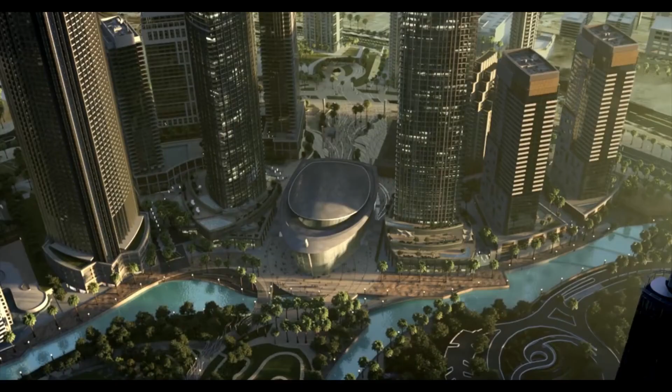With over $1 trillion worth of mega construction projects in the GCC, either planned or under construction, the region is not short of construction activities and potential opportunities for the near future. There has been a slowdown of new mega projects being announced since 2019 due to fall in oil prices and the coronavirus pandemic. However, the mega projects announced in the last few years present a wide array of opportunities to the industry participants, especially in the building, manufacturing, and infrastructure sectors.

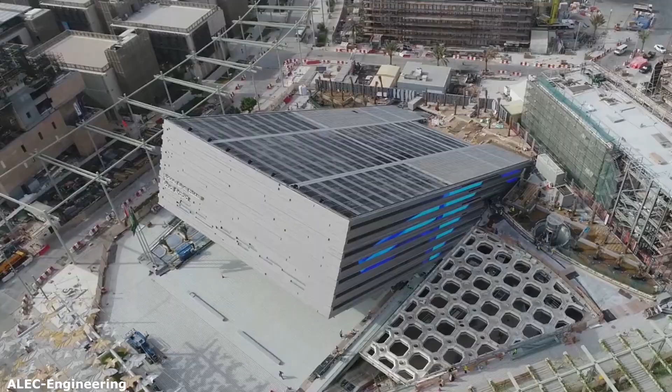These are the 10 mega projects handpicked by the Top Channel, which will keep the construction industry in the GCC region active in the near future. The projects are either in the pre-execution stage with construction expected to commence later this year, or in the early construction stages.

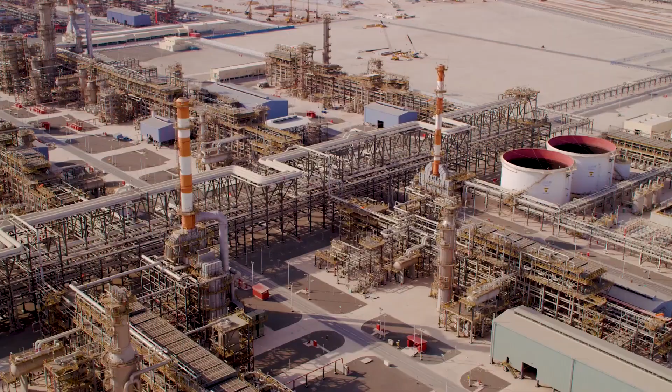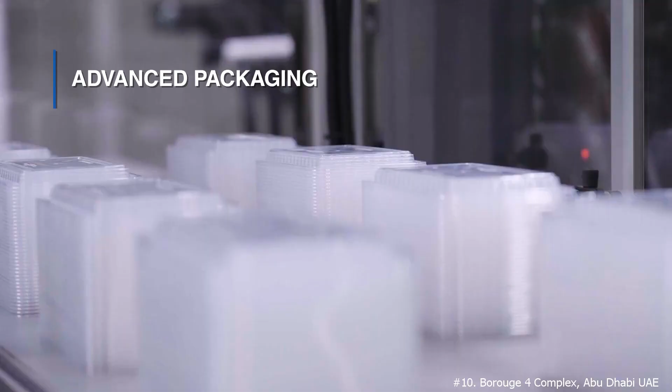Abu Dhabi National Oil Company, ADNOC, and Austrian chemicals producer, Borealis, have started construction of the fourth Borouge facility within the polyolefin manufacturing complex in Ruwais. The plant will help to boost the local supply chain and meet the projected growth in demand for polyolefins in the Middle East, Africa, and Asia, while providing critical feedstock to the TA'ZIZ Industrial Chemicals Zone in Ruwais.

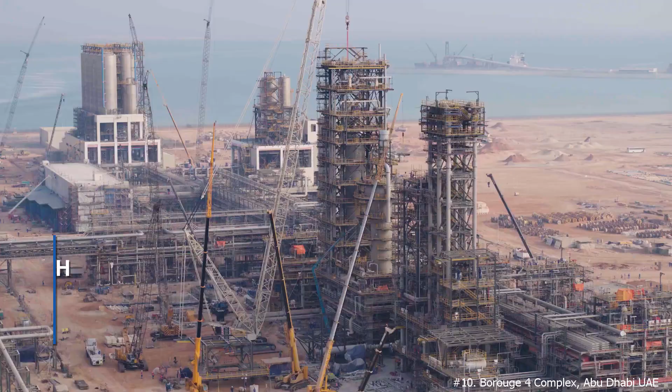The construction of the factory began in February. It will use Borealis' proprietary Borstar technology to produce polyolefin solutions across the industrial sector and will cover an area the same size as about 500 football pitches.

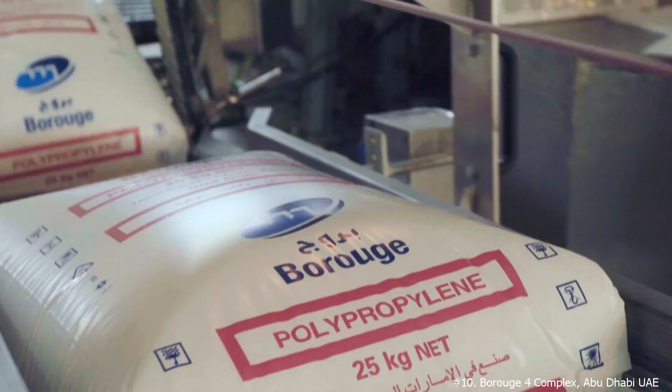Abu Dhabi plans to triple its petrochemical production capacity from 4.5 million tons, currently produced entirely by Borouge in Ruwais, by 2025. Borouge's first polyethylene unit was commissioned in 2001, with a capacity of 450,000 tons per annum. Borouge 2 and 3, commissioned in 2010 and 2014, raised the capacity to 2 million tons and 4.5 million tons of polyethylene and polypropylene per annum, respectively.

Borouge 4 will increase the company's overall polyolefin production to 6.4 million tons, making it the world's largest single-site polyolefin complex.

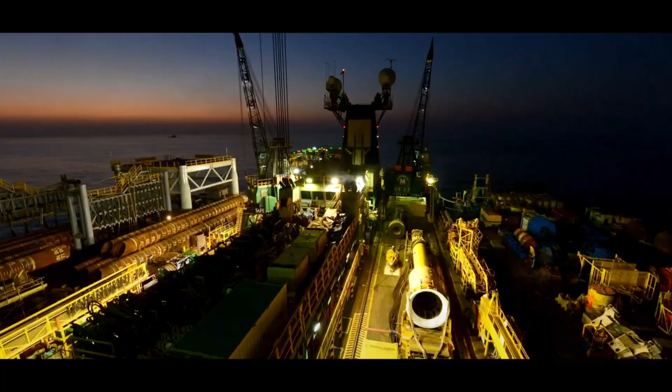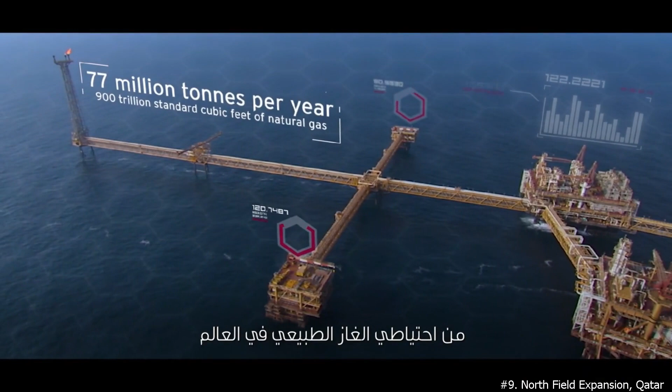The North Field East Project, or NFE, is an expansion of the North Field, the world's biggest single non-associated natural gas field, offshore northeast Qatar Peninsula. The North Field Gas Development Project comprises the North Field Bravo and Ras Gas Alpha offshore complexes, which together contribute approximately 2.8 billion standard cubic feet per day of gas to the total production capacity of the field.

The North Field represents the southern part of the giant natural gas field that is shared between Iran and Qatar. The Iranian side of the field is known as South Pars. Formerly known as the North Field Expansion Project, the NFE project is expected to increase Qatar's LNG, liquefied natural gas, production capacity by 43% from 77 million tons per annum to 110 million tons per annum.

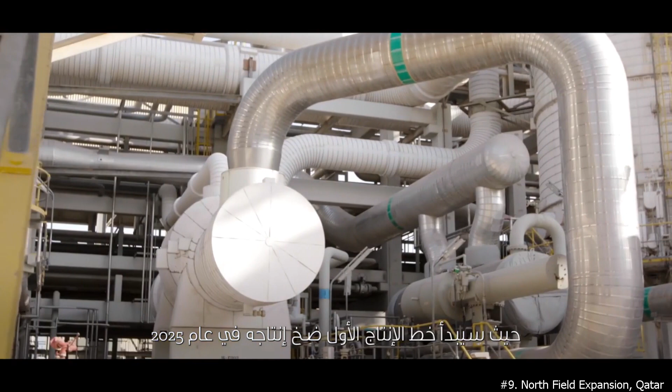When coupled with the North Field South Expansion Project, the combined output will raise the country's total LNG production to 126 million tons per annum, making Qatar by far the largest single LNG producer in the world.

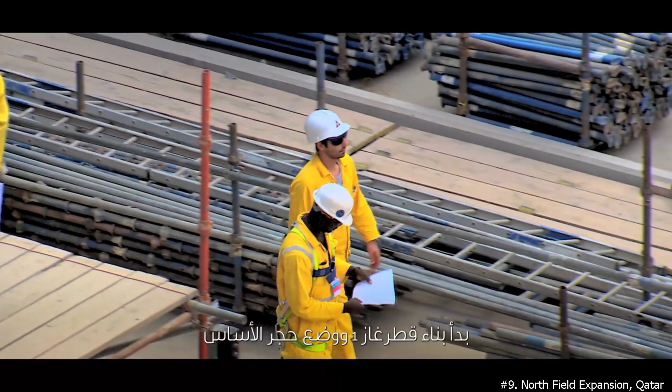Qatar Energy announced the expansion of the gas field in April 2017 after revoking its 12-year self-imposed ban on field development. A moratorium was imposed to evaluate the impact of the growing output from the reservoir in 2005.

First gas from the $28.75 billion project is expected to be produced by 2025. Total production is expected to be 1.4 million barrels of oil equivalent a day. The project is in line with Qatar's National Vision 2030, which aims for more sustainable development by 2030.

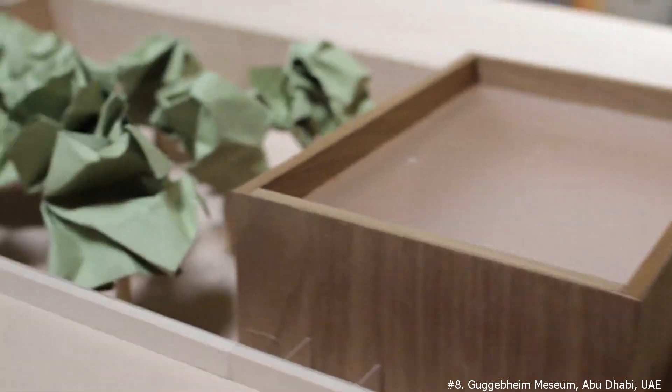Designed by legendary architect Frank Gehry, the Guggenheim Museum in Abu Dhabi will open in 2025. The museum will be located in the Saadiyat Island Cultural District, near downtown Abu Dhabi, where the Louvre Abu Dhabi was also constructed. The 42,000 square meter building will become the largest of the 4 Guggenheim museums, which has branches globally, including New York, Venice, and Bilbao.

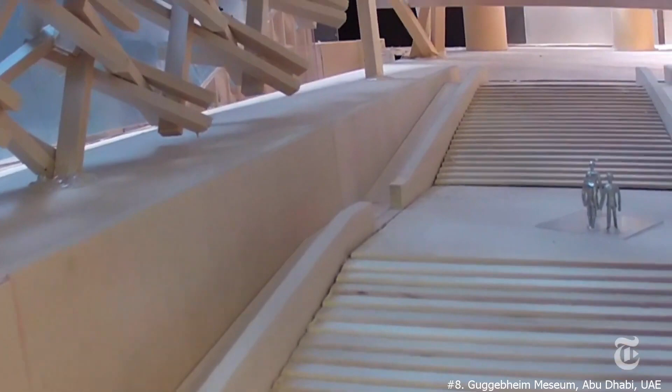Gehry's design is an artwork in and of itself and resembles a sculpture with its buildings of various sizes in conical and square shapes. The design of the building is an experiment in inventive 21st century museum design and will comprise a cluster of galleries of varying heights, shapes, and characters.

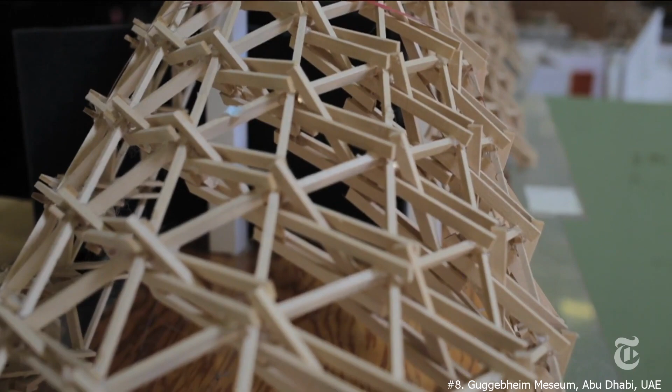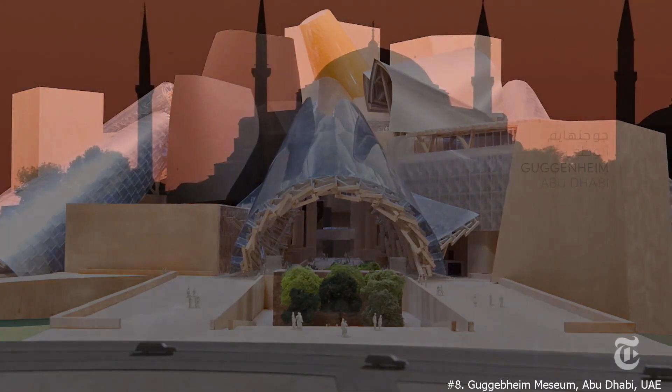The setting inside includes 27 galleries and spans nearly 125,000 square feet, a size comparable to that of the Tate Modern in London. The final building will also contain a Center for Art and Technology, a children's education facility, archives, a library, and a conservation laboratory.

Visitors can expect to see around 600 works from 300 artists who hail from 60 countries. The Middle Eastern, American, Asian, and African names are all represented. Art world stars such as Andy Warhol and Jean-Michel Basquiat will have works on display, alongside lesser-known Emirati artists such as Hassan Sharif.

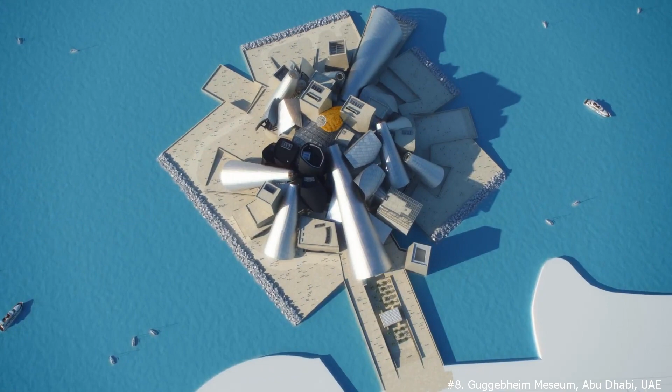Abu Dhabi announced its plans for the Guggenheim 15 years ago, but it has since been fraught with protests from artists and activists who accused the UAE of labor abuse. Cancelled contracts, the global financial crisis, and the crude oil collapse in 2014 that caused a slowdown in government spending only added to its many delays.

The race to build the world's tallest skyscraper never ends, with more and more impressive heights reached. Consider that, just a century ago, the world's tallest building was the Woolworth Building in New York at 241 meters high. It was 13% taller than the previous record holder, the Metropolitan Life Insurance Company Tower, also in New York.

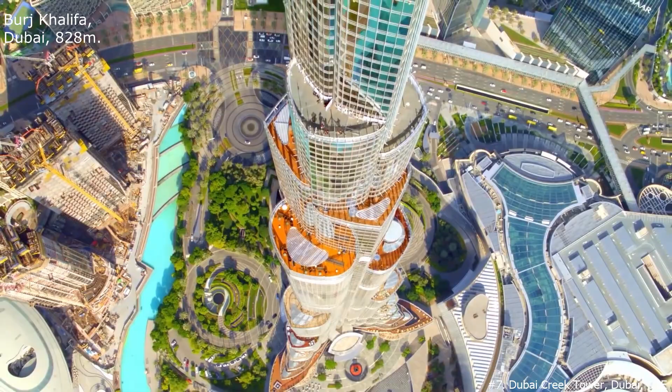In this new millennium, the famous Taipei 101 in the Taiwanese capital shattered the psychological threshold of 500 meters. In recent years, the record was firmly snatched by the Burj Khalifa in Dubai, which, topping out at 828 meters, has held the record since 2010. But this supremacy seems destined not to last too much longer.

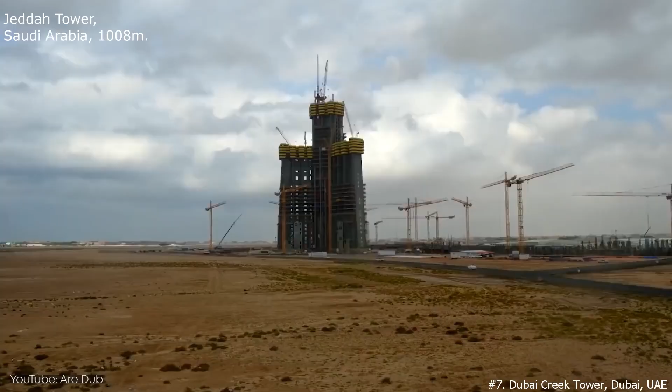The Saudi Crown Prince, Mohammed bin Salman, or MBS, is no joke of a man. His vision for his country is on steroids. The Jeddah Tower on the shores of the Red Sea is destined to reach 1,008 meters, far more than the Burj Khalifa. This project persuaded the sheikhs in Dubai to begin construction of the Dubai Creek Tower to wrestle back the world's tallest tower record and create another flagship tourist attraction.

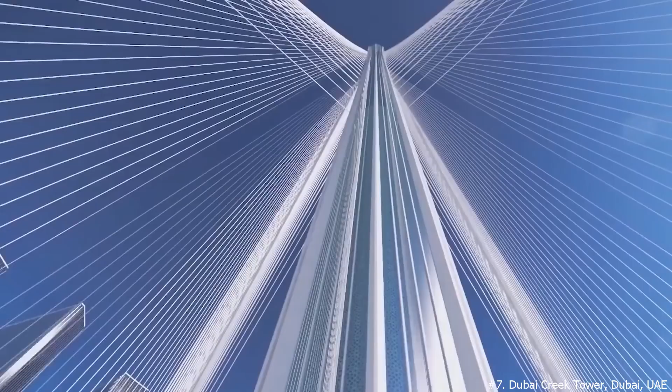The Dubai Creek Tower's shape will extravagantly differ from any other skyscraper. The design is inspired by the Islamic architectural tradition, specifically the architecture of age-old minarets, and the desert lily flower is also a source of inspiration.

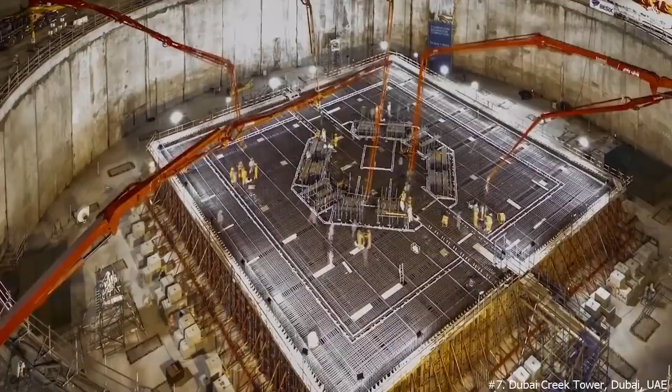Construction work began in 2016, and after foundation preparations were completed in May 2018, the whole project was put on hold temporarily due to the COVID-19 pandemic. At that time, no construction activity had occurred on the site of Dubai Creek Tower for almost 2 years.

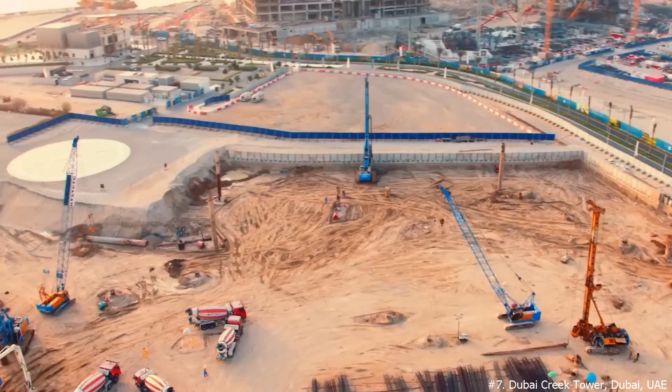All mentions and renders of the tower were removed from the project's website at some point during July or August 2020. On December 7, 2020, the suspension of construction was declared indefinite, until the government allows work to resume once the pandemic is under control.

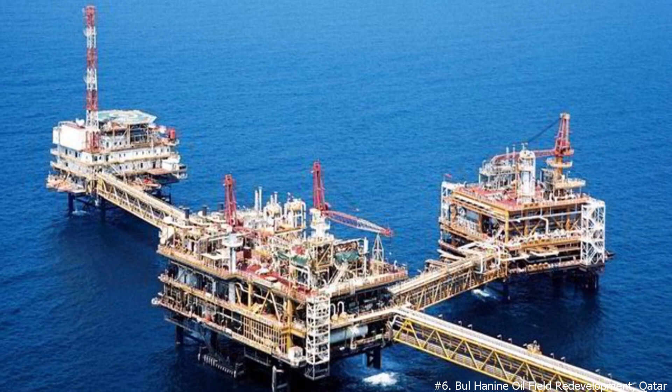Bul Hanine Field is located approximately 120 kilometers to the east of the Qatari coastline and currently produces 40,000 barrels of oil per day. The field was discovered in 1970 and opened in 1972. The oil field produces high-quality crudes, associated gas and condensate, and is operated by Qatar Petroleum through offshore production station PS3.

Qatar Petroleum, the field operator, announced plans to redevelop the field in May 2014 when oil prices were about $110 a barrel. The collapse in oil prices since then could mean the project will be delayed, or that Qatar Petroleum will seek to reduce the cost of its development. The redevelopment was aimed at increasing production to 90,000 barrels per day by 2028 to counter its declining production.

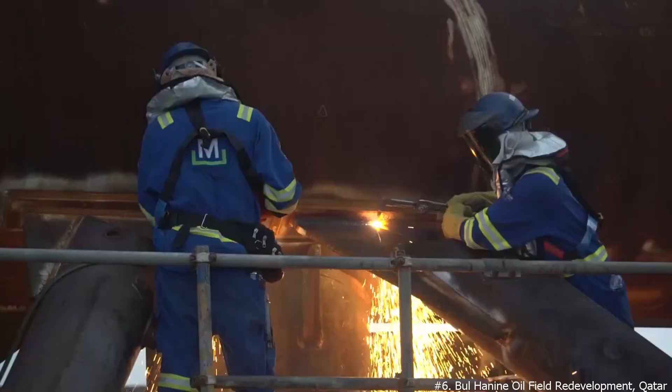A contract was awarded to McDermott International in October 2015 for the engineering, procurement, construction, and installation of 4 wellhead jackets. Plans for the field redevelopment involve an investment of $11 billion, making it one of the biggest projects to be managed and executed by Qatar Petroleum.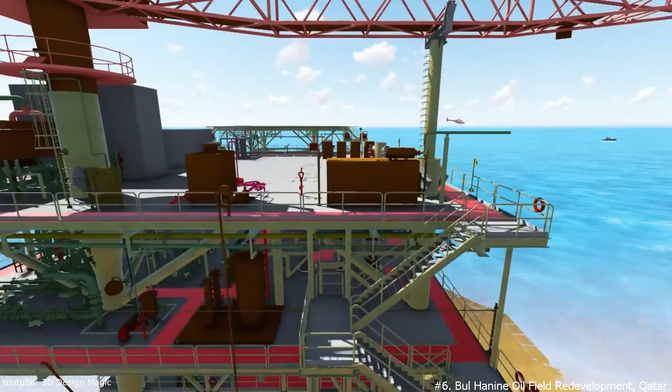A total of 150 new wells are planned to be drilled by 2028 from both existing and new wellhead jackets. Modification work will be carried out on the existing wellhead jackets for the excavation of new wells, in addition to installing 14 wellhead jackets. The Bul Hanine redevelopment project involves both offshore and onshore facilities that include a new central production facility and an onshore gas liquids processing facility at Mesaieed.

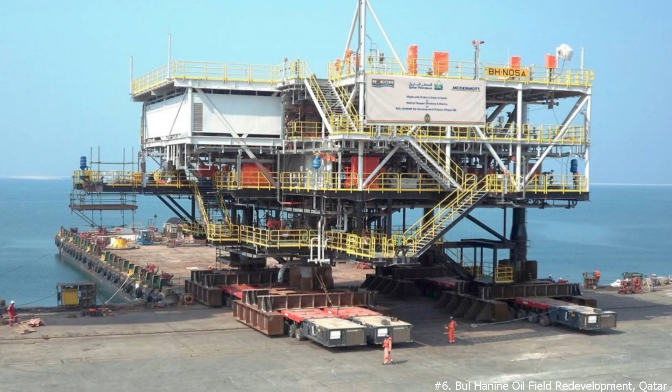An estimated 900 million cubic feet a day of sour-rich gas will be transported through a new 150 kilometer pipeline to Mesaieed for processing. An offshore central complex consisting of production, compression, utility, and living quarter platforms will be installed. Topsides will weigh between 4,000 tons and 14,000 tons. Fluids obtained from the wellheads will be processed at the complex.

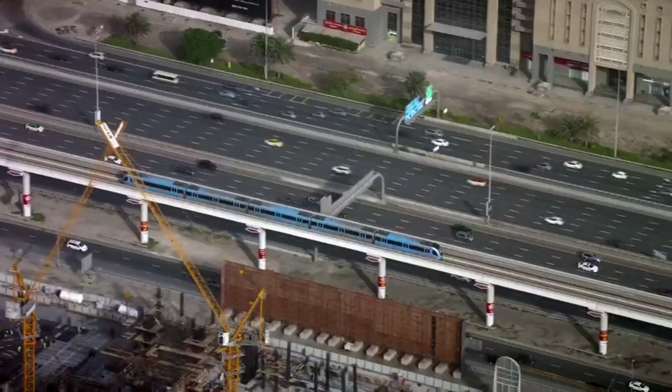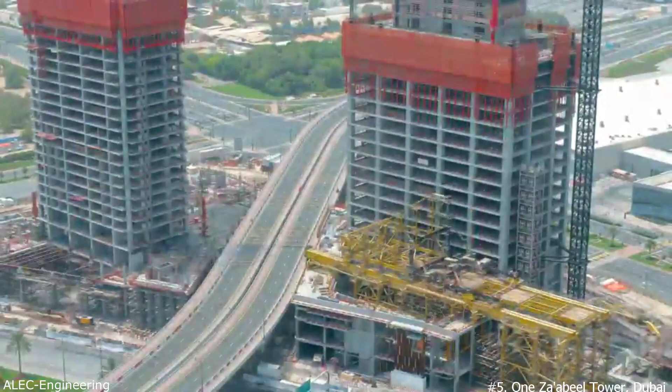Just when you think Dubai has run out of ways to impress the world, every one of us is proven wrong. Dubai has embarked on a 3.39 billion dirham development called the One Za'abeel Tower project, and it will be a welcomed addition to the iconic Dubai skyline. This tower opened its doors in 2021 and already has residents, those with deep pockets and big fat checks.

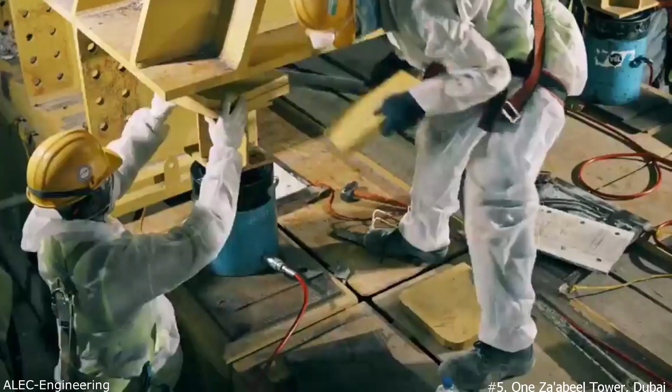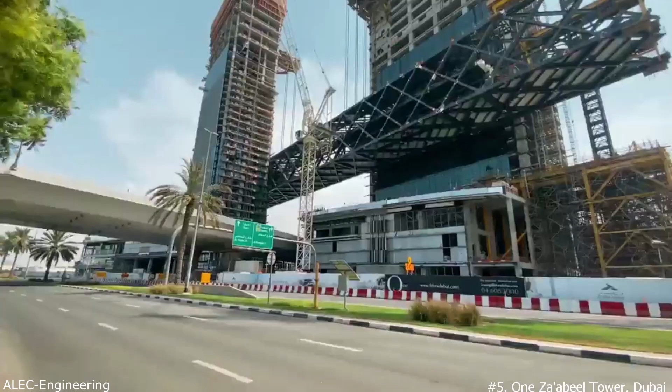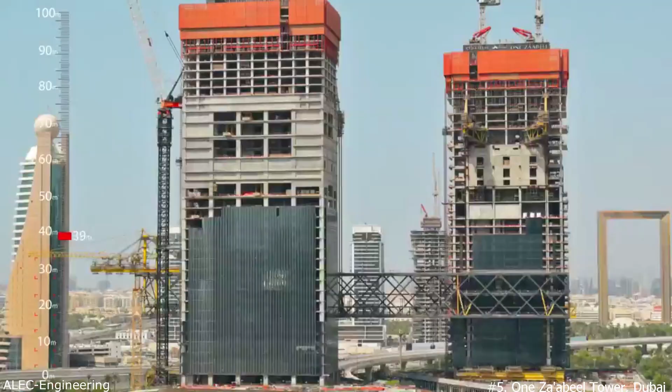Located at a crossroads between the old and new city, the project is in close proximity to Dubai's International Financial Center, International Airport, and the Gold Souks of Deira. Designed by Japanese firm Nikken Sekkei and developed by Ithra Dubai, the latest addition to Dubai's skyline is a mixed-use two towers project. Tower A, standing at 300 meters tall, hosts offices and a hotel, the world's first vertical resort, whereas Tower B, standing at 235 meters tall, is primarily oriented towards residential units.

The towers feature the world's longest cantilever bridge, suspended perpendicularly across the two towers at a height of around 100 meters and weighing 13,000 tons. One Za'abeel's link bridge is called the Link. The Link also reinforces the structural stability of both towers. Its diagonal tube structure provides vertical and torsional strength and allows their upper floors to utilize column-free spaces.

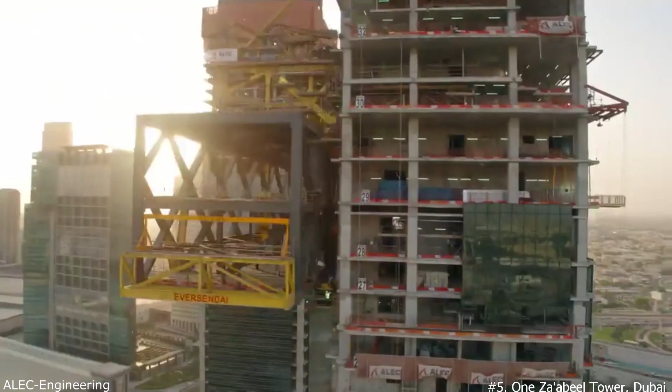The Link hosts entertainment venues, dining with celebrity chefs, an infinity pool, an observation deck with uninterrupted 360 degree views of Dubai, and an immersive glass floor experience.

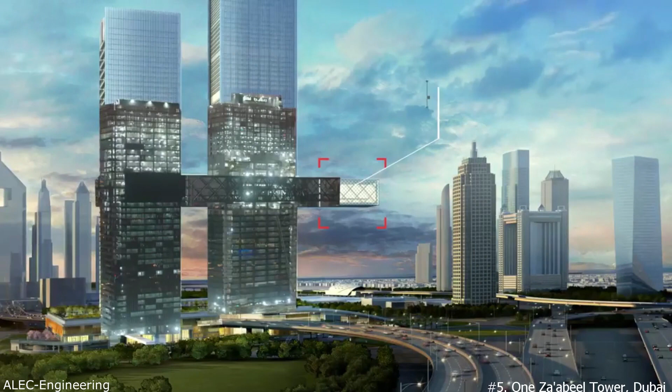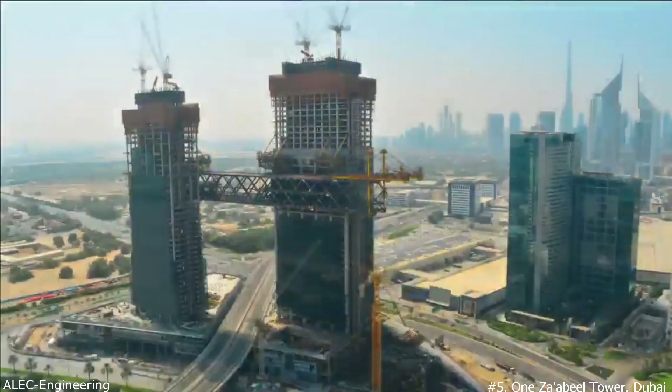The innovative design of One Za'abeel puts in place twin skyscrapers, rising over a total built-up area of 470,700 square meters. In total, there is 37,000 square meters of office space, 263 residential units, 12,000 square meters of retail space, 497 hotel rooms, and 77 high-speed lifts.

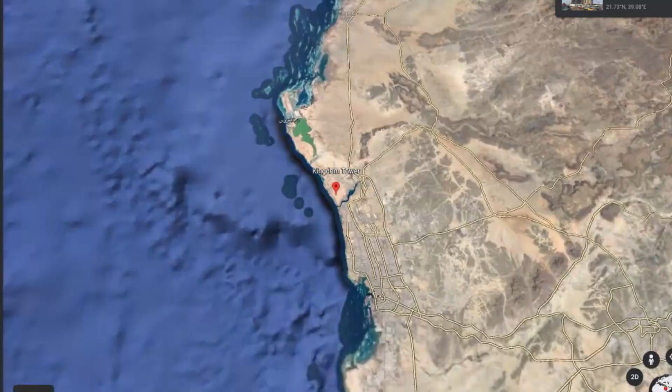Since we talked about the Dubai Creek, how dare we not talk about the Jeddah Tower? The crown jewel of a sprawling urban oasis. Previously known as Kingdom Tower, the Jeddah Tower is a skyscraper construction project currently on hold.

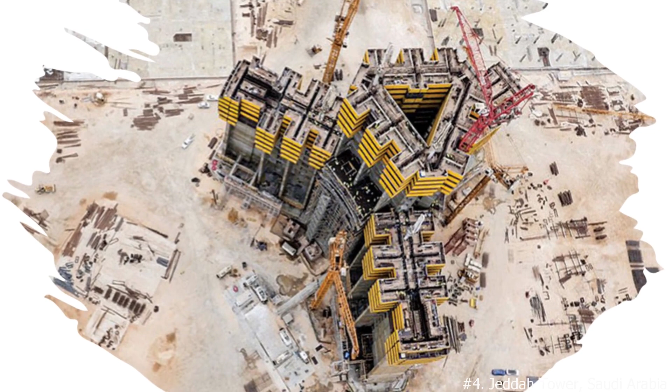Located on the north side of Jeddah, Saudi Arabia, it is planned to be the first 1 kilometer or 3,281 feet high building in human history, a centerpiece of the first phase of a development and tourist attraction known as Jeddah Economic City. The design, created by American architect Adrian Smith, who also designed the Burj Khalifa, incorporates many unique structural and aesthetic features. The biggest similarity being both towers have a Y-shaped plan with 3 exterior walls instead of 4, which makes them more aerodynamic and better able to withstand wind shear at dizzyingly high altitudes.

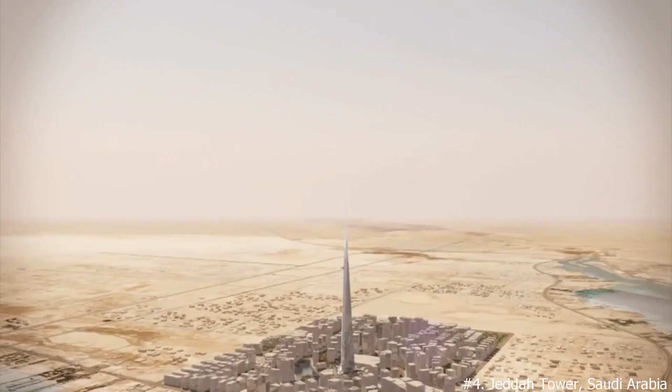The creator and leader of the project is Saudi Arabian Prince Al-Walid bin Talal, a grandson of Ibn Saud and nephew of the kings of Saudi Arabia after Ibn Saud. The exact height is being kept private while in development, similar to the Burj Khalifa.

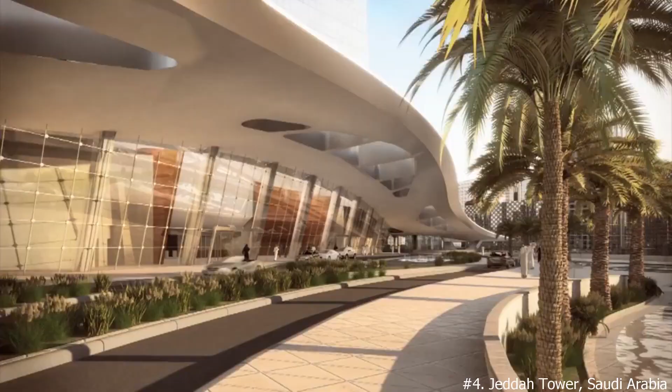At about 1 kilometer, the Jeddah Tower would be the tallest building or structure in the world to date, standing 180 meters or 591 feet taller than the Burj Khalifa in Dubai. The most buzzed about feature of the Jeddah Tower is its open-air observation deck, the highest in the world at 2,178 feet or 664 meters.

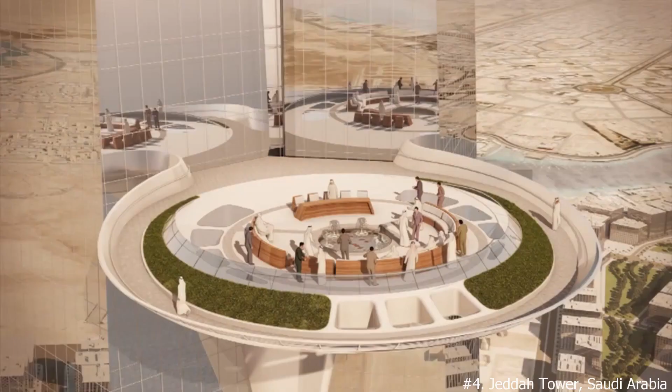The observation deck was originally designed as a helipad, until the architects were informed that it would be too dangerous to land a helicopter at such heights with unpredictable desert winds.

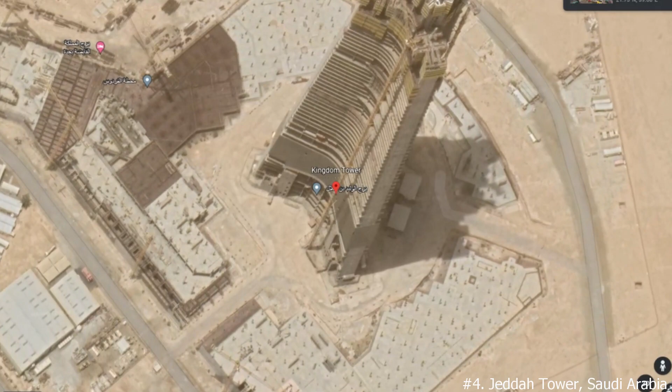There was steady progress, but in January 2018, building owner JEC halted structural concrete work on the tower, about 1/3 completed, due to labor issues with a contractor following the 2017-2019 Saudi Arabian purge. When Saudi Arabia was rocked by a political crisis, in an aggressive move to consolidate power, Crown Prince Mohammed bin Salman, also known as MBS, launched a sweeping anti-corruption purge that resulted in the arrests of 11 Saudi princes, including Al-Walid bin Talal, the key financial backer of the Jeddah Tower, and some of his partners in the Saudi bin Laden Group.

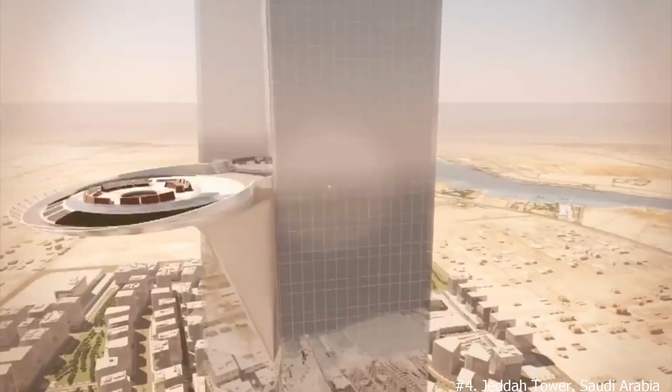The men were eventually released after paying hundreds of millions of dollars in fines, and in 2018 construction resumed on the Jeddah Tower with a planned completion date of 2020, but as of now, in 2022, the tower is still not yet completed.

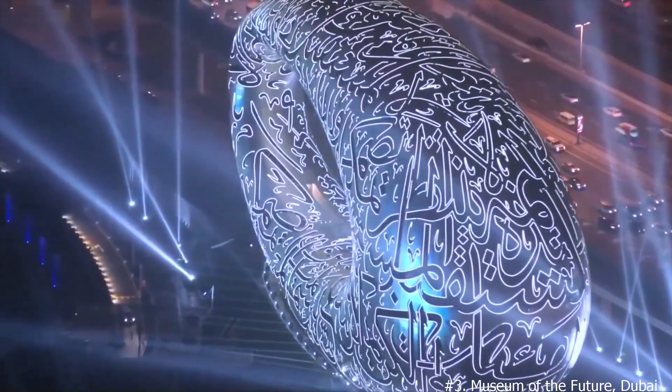Opened in February 2022, the Museum of the Future in Dubai, United Arab Emirates, is one of the most complex structures ever built. Designed by local architectural firm Killa Design, with Buro Happold Engineering acting as lead consultant on the project, the Museum of the Future combines elements of exhibition, immersive theater, and themed attraction, inviting you to look beyond the present to the possible.

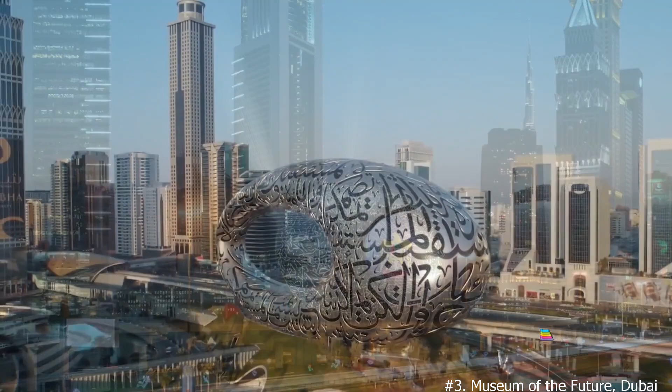The dynamic and impressive landmark in Dubai's heart comprises three main parts: the Green Hill, the Building, and the Void. The striking 77-meter-high structure consists of 7 floors within a torus-shaped shell sitting on a 3-story podium.

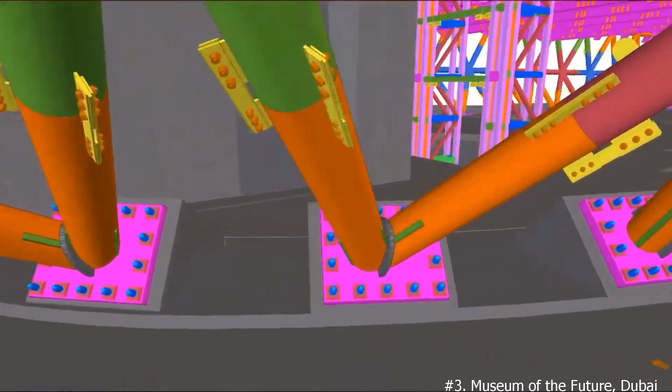The Museum of the Future will have floors dedicated to distinct experiences. Three floors of immersive exhibitions will focus on the possible futures of outer space resource development ecosystems, bioengineering and health, wellness, and spirituality. Another floor will showcase near-future technologies that will transform our world by addressing challenges in areas such as health, water, food, transportation, and energy.

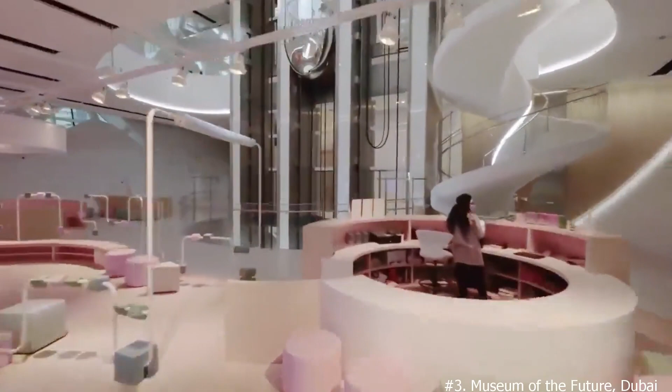The final floor will be dedicated for children, where they will explore and solve challenges in their own inimitable way to become our future heroes.

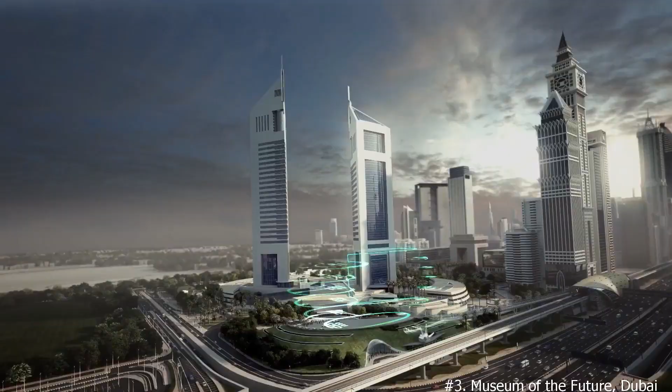The building facade is clad in stainless steel, achieving LEED Platinum status, and designed holistically through BIM at every design stage. The building also depicts flowing Arabic calligraphy, forming poems that describe the vision for Dubai's future. The museum's innovative look has set it apart as a showcase for future technology building design.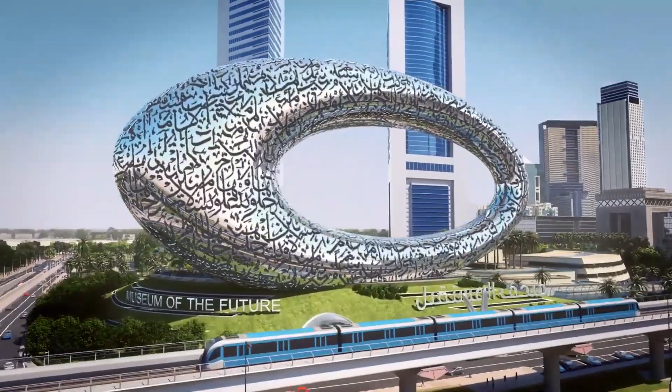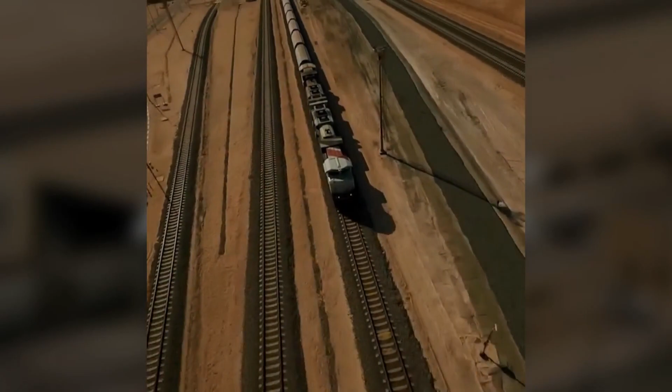Etihad Rail, a 1,200 kilometers railway infrastructure, is the UAE's new national rail network, with an estimated investment of 40 billion dirham, equivalent to $11 billion.

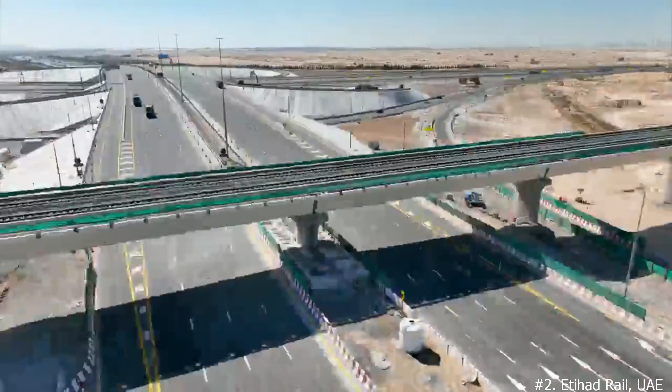The railway infrastructure will become a vital part of the $100 billion Gulf Cooperation Council, the GCC Rail program. The GCC railway network will connect the UAE with Saudi Arabia, Qatar, Kuwait, Bahrain, and Oman, and is expected to be ready by 2024. The railway track extends from the Saudi Arabian border through the entire length of the UAE to Fujairah on the Indian Ocean coast.

The network has been designed for freight and passenger services, bringing communities and resources together by increasing connectivity throughout the region. Construction of the Etihad Rail is divided into Stage 1 and Stage 2.

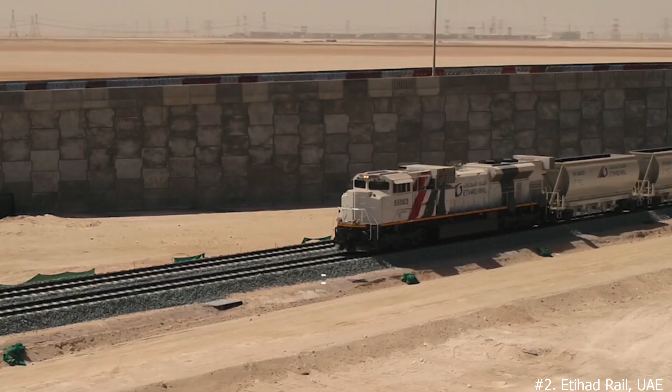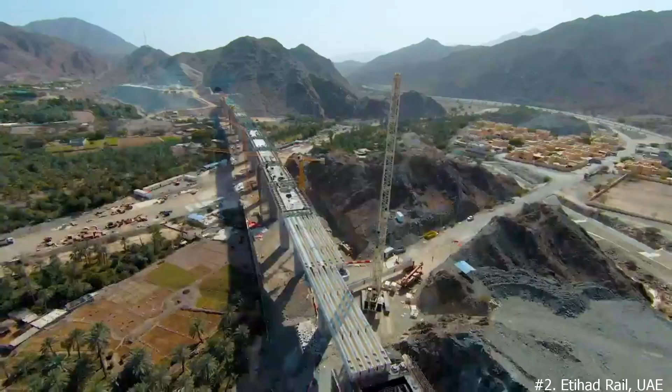Stage 1, connecting Shah and Habshan to Ruwais, was completed in January 2016 and was built in collaboration with the Abu Dhabi National Oil Company, ADNOC. It transports approximately 7 million tons of granulated sulfur a year from Habshan and Shah to Ruwais in Abu Dhabi for export.

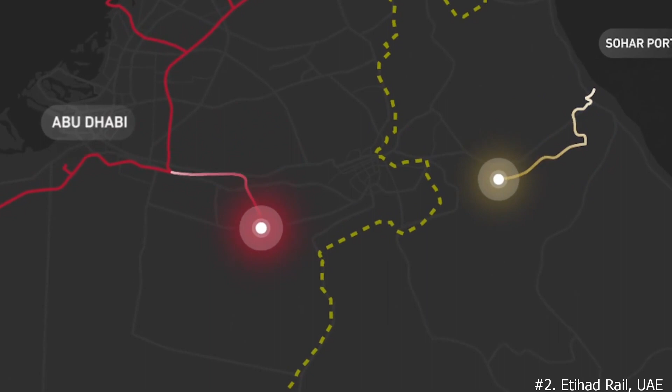Stage 2 of the railway line is 605 kilometers long and extends from the Saudi Arabia border at Ghuwaifat and connects the Emirates through Abu Dhabi, Khalifa Port, KEZAD, Dubai, Ras Al Khaimah, Jebel Ali Port, Sharjah, and Fujairah on the east coast of UAE. More than 70% of Stage 2 of the railway network has been completed. The new railway project is expected to be a sustainable and efficient alternative for the transportation of freight and passengers throughout urban and rural areas of the Emirate.

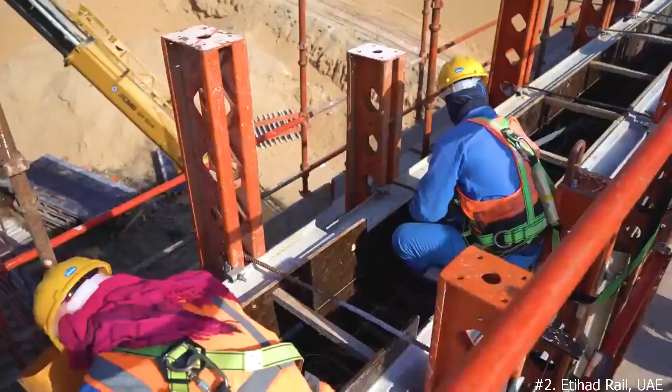The new railway project is expected to be a sustainable and efficient alternative for transportation throughout urban and rural areas of the Emirate. It is expected to serve approximately 16 million passengers and 50 million tons of freight.

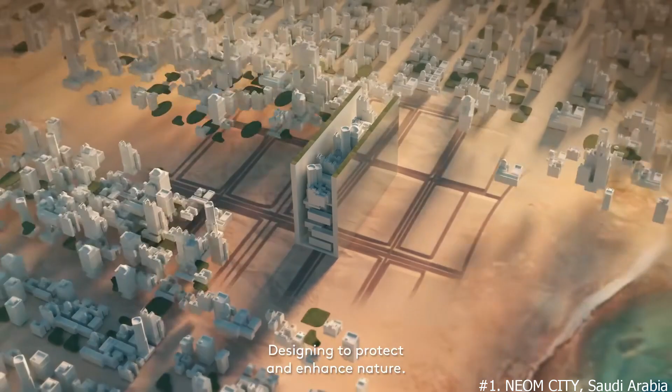The flagship project of the Kingdom of Saudi Arabia's Vision 2030, NEOM, is a planned $500 billion high-tech city on the country's northwest coast. Situated at the crossroads of the world, the city will span 26,500 kilometers squared and is strategically placed east of Egypt, south of Jordan, and extends 460 kilometers along the coast of the Red Sea.

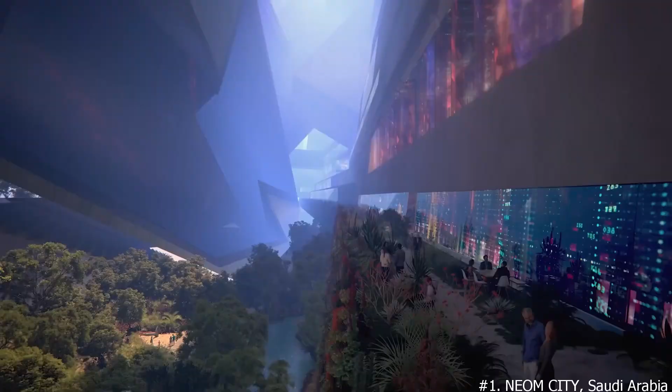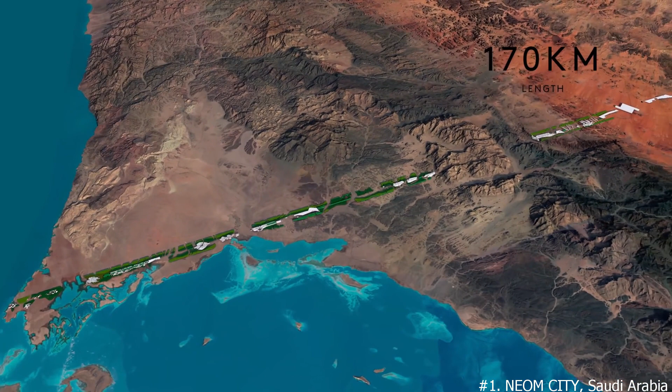Dedicated to future technologies across 16 sectors, including food, manufacturing, and technology, NEOM will introduce a new model of living, focusing on nature and creating a sustainable, livable, and walkable city. NEOM will be powered by 100% renewable energy and become a tourist and innovation hub.

At the center of the city's design is The Line, a 170 kilometers belt of hyper-connected future community, without cars and roads and built around nature.

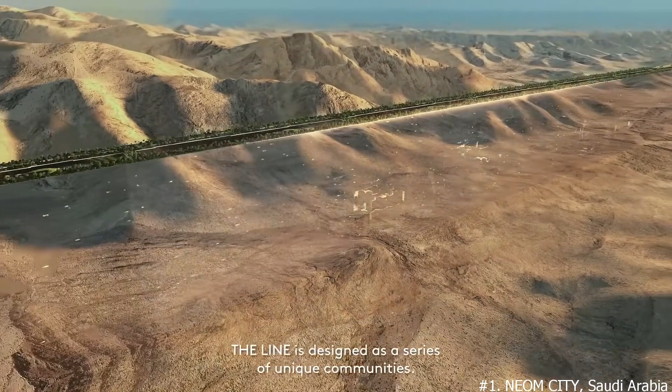This revolution in urban living at NEOM is designed to become a blueprint for how people and the planet can coexist in harmony. The city will include 9 specialized investment sectors: energy and water, mobility, biotech, food, technological and digital sciences, advanced manufacturing, media, and entertainment.

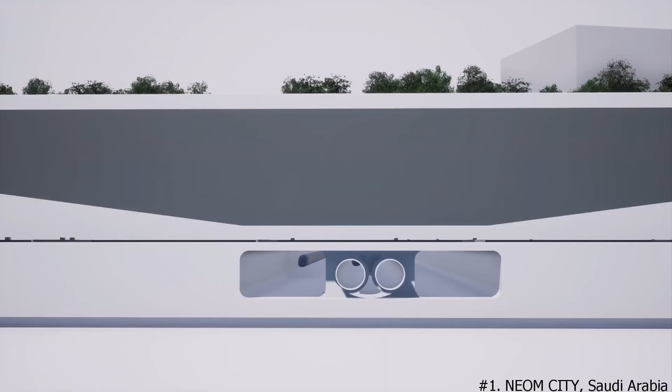Robots may outnumber humans in a new pioneering city built by Saudi Arabia as a new blueprint for sustainable life, which would be entirely powered by renewable energy and served by driverless vehicles and vertical farms.